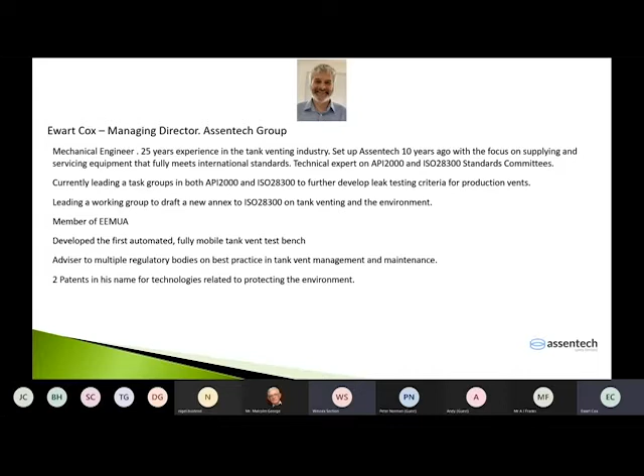Before I go into the presentation, we've been looking very closely at how we measure and control flow through the test benches. Where I'm going in this presentation only comes into the technical detail about a third of the way in. Because I've been developing this myself with a couple of colleagues, sometimes you feel you're too close to it and can go into a lot of technical detail without putting everything into context.

So I've done a few slides on just why we think that leak testing on breather valves is important.

David Attenborough has said in his recent book that we are the first generation to truly understand the impact we've had on the environment, and the last to be able to do something about it. I'm definitely dedicating my career, or what's left of it now, to ensuring we do what we can to produce technologies that can reduce emissions.

Probably quite relative to my career - I'm 56 now - given 1 hour to save the world, Einstein would spend 55 minutes defining the problem and 5 minutes fixing it, and that feels a little bit like where I am right now.

I've spent a lot of my career trying to work out how to make the most of breather vent function, and now we've got the solution. We're out there trying to get these into the mainstream and get people using them.

Mark Carney - interesting guy. We all know him as the ex-governor of the Bank of England, but he's now UN envoy for climate action, particularly with an interest in finance. He says a lot here, and this presentation is available to anybody that wants it at the end of this talk.

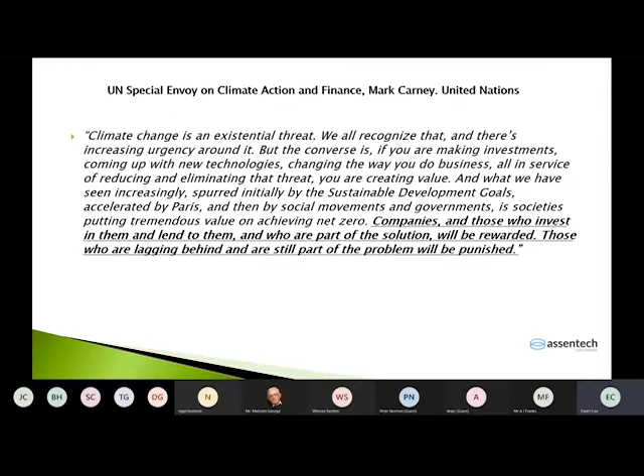Without going into the full details, at the end he says the companies who invest in reducing emissions to the atmosphere and improving our condition currently will be part of an overall solution and will be rewarded. Those who are lagging behind will be seen as part of the problem and will be punished. So it's an interesting aspect that we've all got a role to play in reducing emissions to the environment, and I am very much an environmentalist from that point of view.

Principal aims for reaching net zero: we're talking about emissions from tank breather valves, and there are a lot of tanks based around this country, and a lot of them contain volatile organic compounds. So there's a big part to play with the tank storage industry in terms of reducing emissions.

Reaching net zero, in accordance with the Paris Agreement, COP21, was not to exceed a global warming target of 1.5 degrees C over pre-industrial levels. The initiatives are now in the mainstream. The whole industry has completely changed in the last 18 months to 2 years, and it's now part of the daily dialogue about how we can reduce emissions.

I've been working on this test bench for 7 years, but now timing seems to be quite good for what we're doing. Adaptation - everybody is now looking actively to reduce their carbon footprint. Offsetting is a big part of that, and I genuinely don't fully understand what offsetting means, apart from some of the big operators now planting forests in South America and things. But offsetting has a part to play in the whole way that we reduce emissions to the atmosphere.

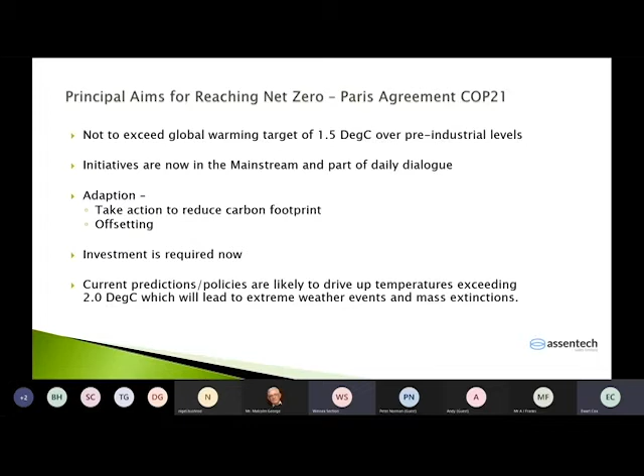Investment is required now, and we've invested a lot of time into developing technologies to reduce emissions, and we want to see those rolled out. Current predictions and policies are likely to drive up temperatures exceeding 2 degrees, which will lead to extreme weather events and mass extinction. So, not wanting to sound extreme, this is quite important that we do something about it, and we've all got a little role to play.

So from an ESG investment perspective, many of you may have heard of this, it's environmental, social and governance advice. PwC are just about to start a recruitment drive for 100,000 new heads. Ernst & Young, KPMG, Deloitte are all doing the same. So all the big blue chip companies are now having to report and declare their carbon footprint and a number of metrics, all agreed by the Intergovernmental Panel on Climate Change, the IPCC. We've all heard about the IPCC on the news.

So this is what the majors are saying. Everybody is on the route to net zero. So it's time. Our mission is to help investors improve profitability and safety by detecting and reducing fugitive emissions that can harm people, wildlife and the environment. We want to work together with our customers to get them on the road to net zero in our particular niche of industry. We're very focused on a small niche of the industry, but we think it's an important one.

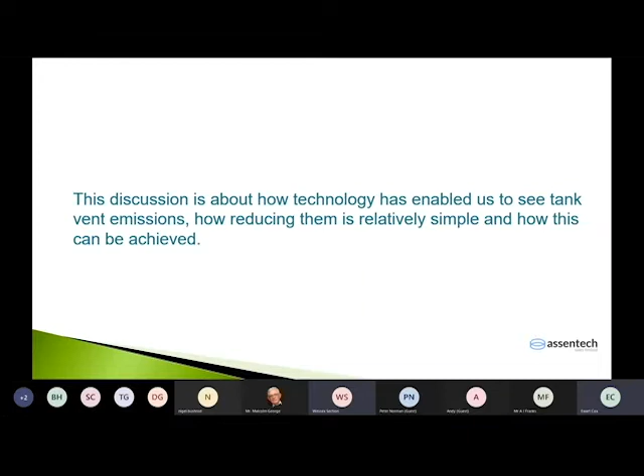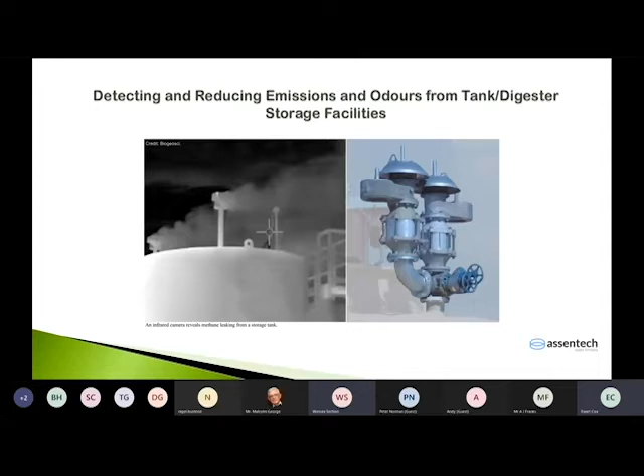So this discussion is about how technology has enabled us to see tank vent emissions and how reducing them is relatively simple and how this can be achieved. This is just a cover sheet really for the start of the presentation. The next part is really a breakdown of the areas where we can help reduce emissions.

So optical gas imaging - there are two camera technologies available. One camera is a long wave uncooled camera, which is generally used in the biogas industry, for looking at, it picks up methane. And the video that follows in a moment will show you methane emissions. There's a shortwave cooled camera that can be used to detect a wider range of volatile organic compounds. I should say the uncooled camera is also used for detecting SF6, sulfur hexafluoride, which is used on power transformers, that sort of thing.

So the third item there is the quantitative tablet. Some of the regulators are now seeking to act on measurement of emissions from tank storage or any sort of facility where there are leaks, and this quantitative tablet is now being used for enforcement. It's quite an interesting piece of equipment.

So how are we doing? How are we helping the industry improve? We're offering technical advice and support. I've got 25 years plus experience in the industry, and every day I learn something new, and every day I share a lot of my experience with customers. So we want to share our knowledge and help customers use venting accurately and get the most out of them.

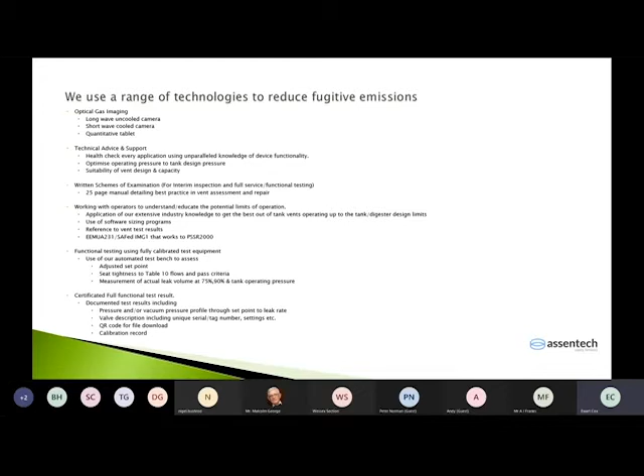Okay, so here's a short video.

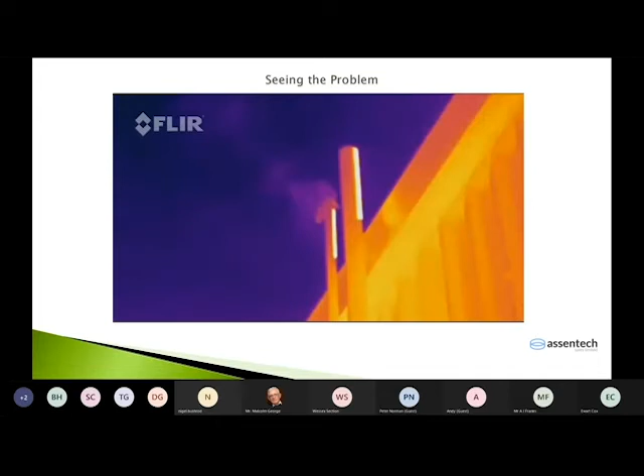Thermography is a very interesting science, and we've been working with FLIR cameras now for a couple of years, and we find the technology absolutely fascinating.

To give you a feeling for the process pressures we're working with, an average storage tank has an operating pressure of about 20 millibars. That's not enough to fully inflate a party balloon, but it will lift a 25-meter tank off its base, creating a 10-ton lifting force. So the pressures are tiny, but the forces are huge.

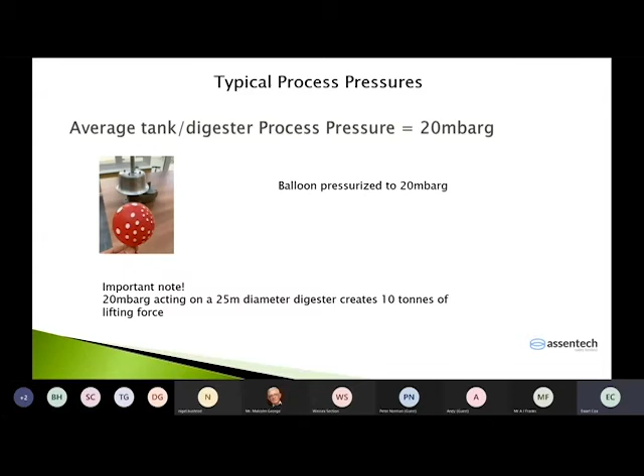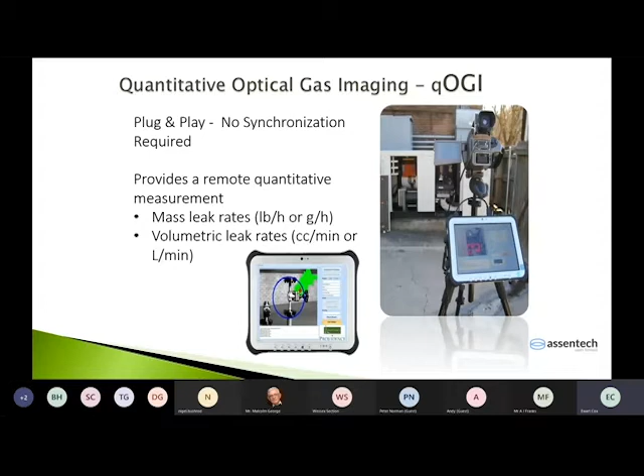This is quantitative optical gas imaging. It's a tablet that fixes to the camera, and in this photograph it's a shortwave, cooled camera. If you put in the basic details of the VOC, it will calculate the actual volumetric flow. Very interesting technology.

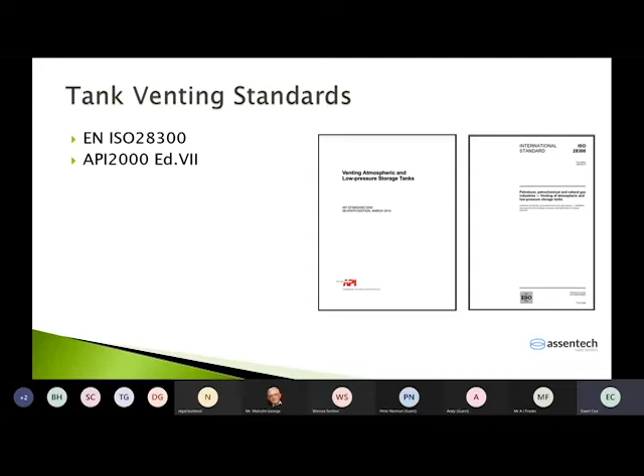The tank venting standards we work to include ISO 28300, launched in 2008, which is currently being reviewed for revision, and I'm on the committee for that. API 2000 is currently in edition 7, started back in 1968, and edition 8 is coming up shortly. I'm also on that committee. So, a brief history of leak testing.

Even though it's not in common dialogue, leak testing was first listed back in 1966 in an API bulletin, and it has continued to evolve, now forming part of the current core standards for tank breather vents.

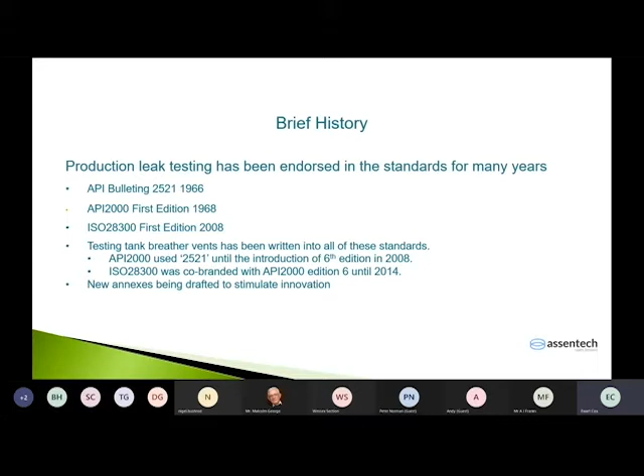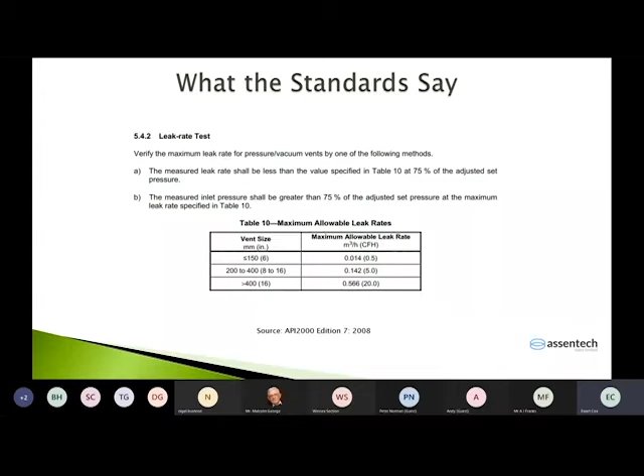These standards define the allowable leak rates from a storage tank based on size. Up to 6 inches, you're allowed 0.5 cubic feet per hour. 8 to 16 inches is 5 cubic feet per hour, and 16 inches or larger is 20 cubic feet per hour. To put it in context, 0.5 cubic feet per hour is about the size of a large shoebox - that's the amount of air allowed to escape past the valve on a test bench during the test in order to pass the criteria. So it's quite a tight test.

Some worrying facts - this gives you an idea of what we've learned in the last 25 years operating in this industry. Of the 20 manufacturers we regularly come across, only 2 undertake production test, leak and calibration testing of new valves prior to dispatch to the industry, for standards on both pressure and vacuum. So only 2 companies do the tests properly, exactly to the standards, on both the pressure and vacuum sides.

We don't think it's safe practice, because there's no guarantee the valve has been assembled correctly. Unless you do a test at the factory before the valve is dispatched, you don't know it's been assembled correctly. You put it on a tank that costs over £1 million to replace, and you could pull the tank in because somebody's put the pressure pallet on the vacuum port and vice versa. And they will fit - believe me, they do fit. Usually they've got the same seat ring diameter, so it's only the height of the stem and maybe the weight that would tell the difference.

Because you're not going to get any documentation, you won't have any way to conform to ISO 14001. One of the easiest wins for ISO 14001 continual improvement is to produce leak test certificates for the valves.

Critical asset documentation, service trails. Breather vents are often classified as critical assets under COMAH, and you can produce a very easy trail of review and functional testing if you have leak test certificates, but you can't if you don't. There's no declaration of leak tests on a valve that's not been tested, so you can't use it as part of your DSEAR review either.

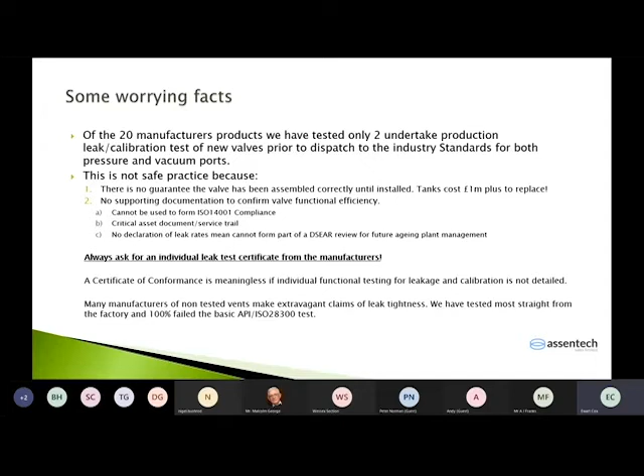And many of the manufacturers of the non-tested valves make extravagant claims on leak tightness, and we've tested most straight from the factory, and all of them failed even the most basic leak test. So there's a lot of smoke and mirrors in the industry.

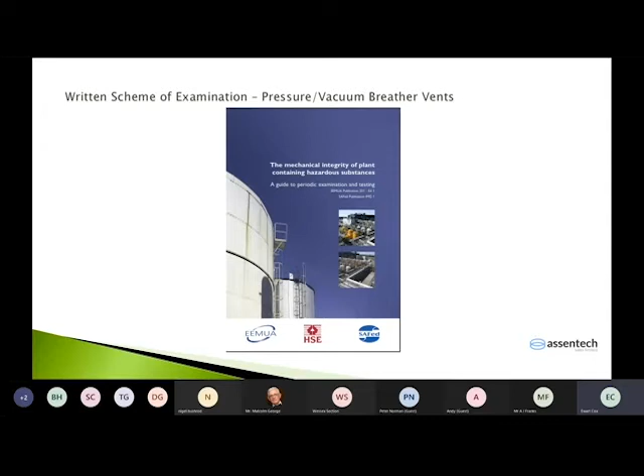So functional testing, this is the bit where I get excited, is that we've developed these devices to measure the functional performance of breather valves. As you'll see, the valve has to be removed from the tank. So this isn't something that you would normally do on a tank every year, unless you had a severe acid or some kind of process where you do need to strip down every year.

Typically, a valve would need a full functional test every 3 years. So we can do 2-inch to 30-inch valves, weight loaded, spring loaded, pilot operated, and we can also test blanket gas regulators. The funny looking dartboard on the right side is for side mounted valves.

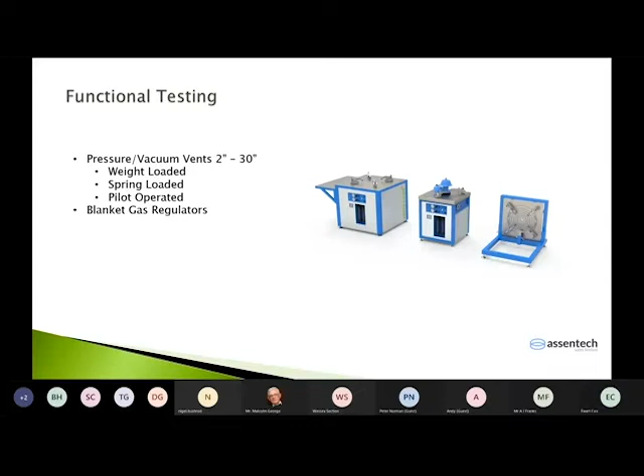It goes in conjunction with one of the little mobile units or the large static, right down to basic forms. The breather valve - I apologise for my rubbish graphics here - but yeah, essentially all the test bench is, you have a pressurized air supply into the valve with a mass flow controller and a pressure sensor.

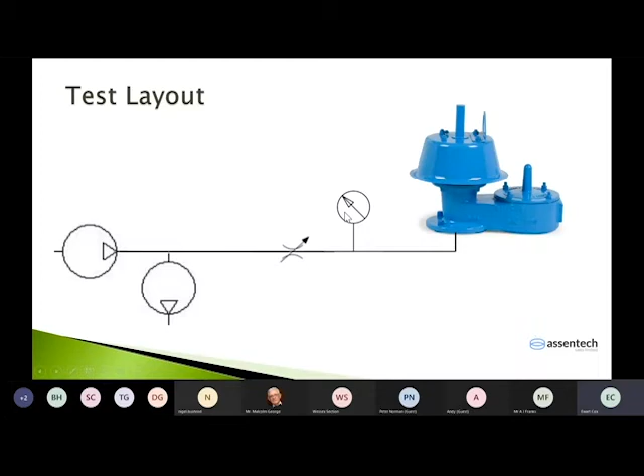So what you record on the laptop that's connected with the test bench is the retained pressure under the valve under certain flow conditions. And the vacuum test is, again, you just pump air out of the test bench and it gets drawn in through the vacuum pallet. You measure the pressure and you control the flow. Very, very simple.

So we cover two elements of the valve function. You've got set point testing, so we fix the flow and you will get a variable pressure. What we're looking for is the standards say that as you increase the flow, you should see a corresponding increase in retained pressure. The point where you increase the flow and you don't see an increase in retained pressure is what is defined as the set point.

It's not like a safety relief valve where they pop open. The set point can be measured by weighing the pallet on calibrated scales, so it's basic physics, force equals pressure times area, but the actual functional test must be done using air. Standards say that the set point should be checked using airflow.

Why should you do that? As I've already mentioned, you've got to first check to ensure the valve was correctly set up. The second point is efficiency, because the valve is a modulating valve, the set point and the leak tightness are very closely linked. On a breather valve, you can create whatever set point you want - it's just a matter of how much air you're putting through it. So knowing the airflow is absolutely critical.

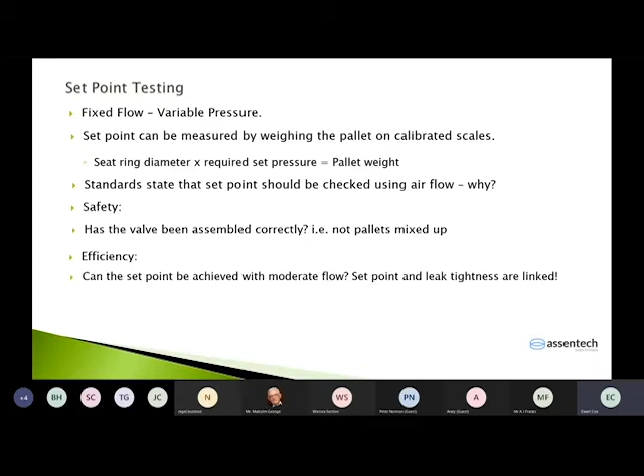So leak testing - this is the big part of the technology we've developed within the test bench. The pass criteria is that you fix the flow. For example, if the valve is less than 6 inches, you fix the flow at 0.5 cubic feet per hour, and you measure the retained pressure, and it has to exceed 75% of the set point. The flow control must be accurate to 0.5 to 20 standard cubic feet per hour to replicate the requirements on table 10 of the standards.

So we use multiple flow controllers, mass flow controllers that control the flow. In the test bench, we use 2 mass flow controllers, and for high accurate leak testing, getting down to bubble testing level, we have a 3rd unit that we put in there. Many customers are now looking for the leak rate at 90%, not 75%.

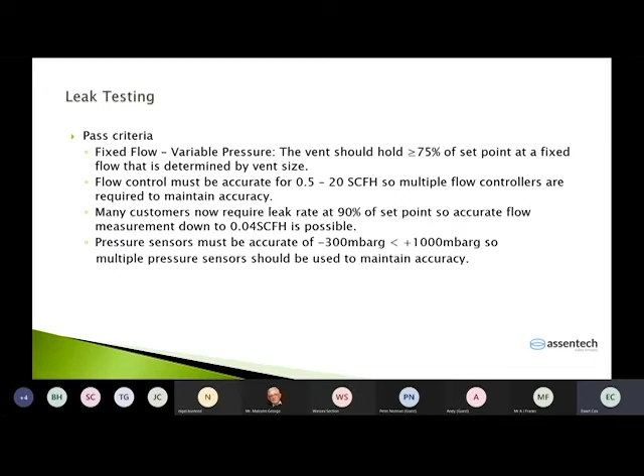We have recently revised our mass flow controllers and pressure measurement so that we can go down to 0.04 standard cubic feet per hour. The pressure sensors must be accurate for minus 300 millibars up to plus 1000 millibars gauge. So we use multiple pressure sensors, and the test bench automatically picks which pressure sensor it's going to use based on the criteria that you set in the valve, in the test bench.

So why is leak testing important? Profitability. The area where most operators are concerned is to ensure they run their tank farms as efficiently as possible. This is all about sustainability, so accuracy of valve function is quite important.

From a quality point of view, volatile organic compounds have light ends which evaporate first, so you can get batches rejected if it's off spec. So keeping those light ends in the tank is important.

Water can be drawn into a tank when it cools down at night. If the valve leak tightness is good, the valve will sit at slight positive pressures during the day. When it cools down, it won't draw in wet condensate, and then you don't get the problems with oxidization, which leads on to the second one. Oxidization of both the liquid in the tank and also the inside of the tank, causing rust particles and contamination that way. And you've got a documented asset management system.

So quality is documentation, so you can keep a tight record on what the function of your valves is. So sustainability in the environment, ISO 14001 is important. Corporate governance, we'll talk about the ESG requirement shortly. Road to net zero, reducing odours, reducing the risk of

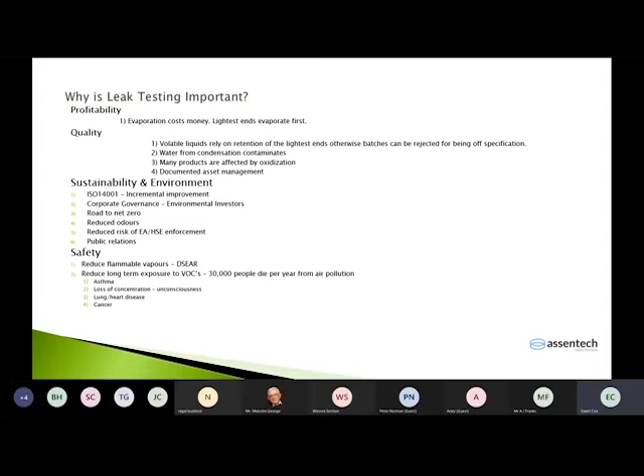In fact, I think it's higher than that, but the vast majority of those are from road transport, but a lot have connections with volatile organic compounds. And that could lead to asthma, loss of concentration and consciousness, lung and heart disease and cancer. So yeah, volatile organic compounds are not good products to be breathing in on a regular basis.

So testing. Efficient testing for set point and leak rate requires the pressure sensors within accurate range with minimal deviations. That's something we build in, and the test bench automatically chooses the right pressure sensor for the range that you're seeking. And flow control is we're now working on a flow rate from 0.04 cubic feet per hour to up to 100 cubic feet per hour.

The procedures - we don't recommend that you test pressure vacuum relief valves on safety relief valve test benches, because they're not calibrated for the very low flows or flow control as a normal breather valve would require.

The additional information that operators are now looking for is not only do they want to know whether it passes, but they're actually asking us what the actual leak rate is at the 75 or 90% of the set pressure, and or the operational pressure. So we can now measure that using mass flow sensors that are built within the test bench.

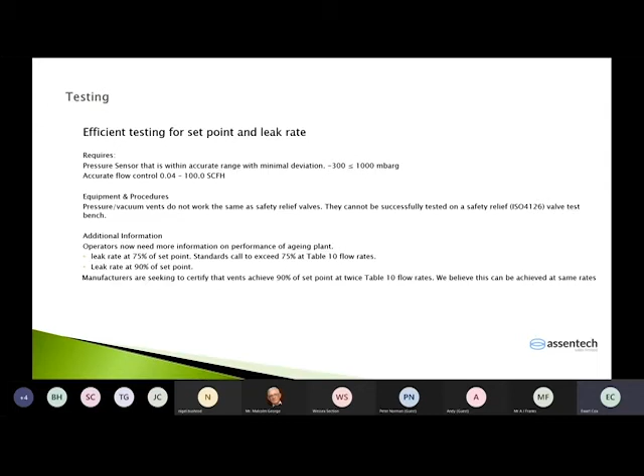So independence of results. We built our first mobile test bench about 7 or 8 years ago. We'd had a fixed test bench for many years, but we then developed this to a mobile test bench, and we had a manual version for many years. When we started investigating the possibility of building our own test bench to apply to the market, we decided to go down the automated route. And the reasons for that are here.

So we wanted to be able to produce fully independent test results. We want to avoid any confusion on site, so avoid the human error or integrity issues. When you produce a set of results, it could be if a valve fails that the operator may need to consider replacing that valve. So we want to make sure that the results that we produce are top integrity and they're fully reliable.

Repeatable tests: we found that using rotameters, two service engineers can produce completely different leak rate results. Because the test bench we've developed has artificial intelligence built in and works on fixed algorithms, it will produce exact identical results every time it tests. So it's fully repeatable.

We can remotely control it because it's cloud-based. You can operate it remotely if you choose to. It's not an obligation by the operator, because some sites we work with do not allow any computers to be connected to the internet.

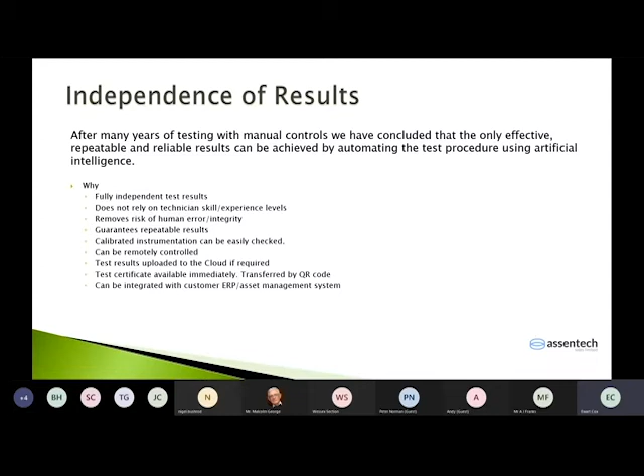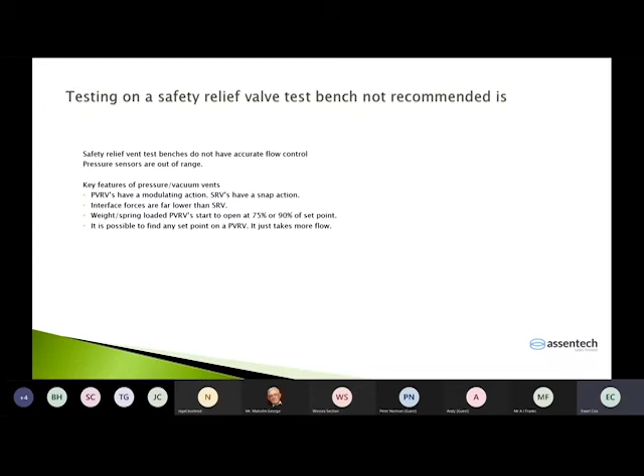Testing on a safety relief valve bench is not recommended. This is typically something which could go up to 100 bar test pressure. We just don't feel they're the right type of equipment to accurately measure leak rates on a pressure vacuum relief valve working at 20 or 5 millibars.

Here's an example of a test, I'll just quickly run this. So just to give you an idea of what we're looking at here: the black line is the valve set point, the blue margin is the allowable tolerance, plus or minus, in this case about 5%, and the green portion is the allowable pass rate.

You'll see down here is 0, and just here you see that the pressure is starting to increase, and the line will go up past the green and into the blue, and it should hit the black and then level off when it hits a set point. You'll then see a drop off of pressure as the test bench goes from set point test to a leak test.

And then the pressure will increase very slightly over a few seconds to indicate what the reliable leak rate is. So you can see the pressure increasing, and this is what you'll get on the readout on the laptop that's connected to the test bench.

So the valve was burped, and it now switches over automatically to the leak rate. In this particular case, the valve's current flow is 0.5 cubic feet per hour, and the flow and retained pressure increase very steadily now.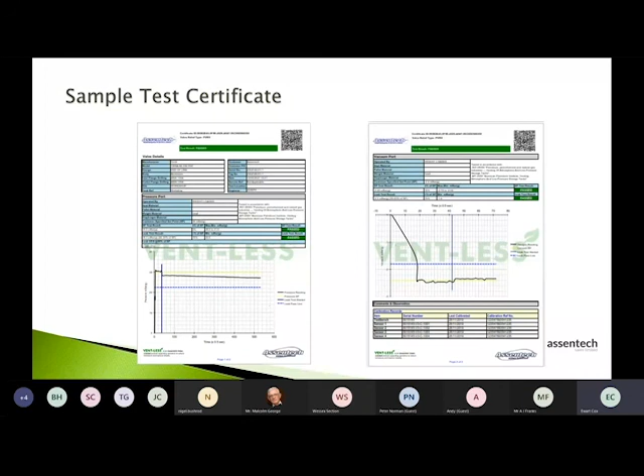We have some customers that won't allow us to put the valves back on the tank until they see the test result, so this is available instantly at the end of the valve test. It requires no input from the technician to fill out any forms - it's all there pre-filled in.

So from a calibration point of view, what we've done is developed this calibration module that clamps onto the top of the test bench, connects with an RS232 plug to the test bench, and follows the pressure. When you connect it up, the test bench recognizes the calibration unit's been connected, and it will automatically run through a test cycle.

You get a blue line and a red line - the blue line being the test bench, red line being the calibration unit - and they've got to track each other. The test bench is designed to allow the tolerance to ensure all the sensors on the test bench are matching those on the calibration unit.

For overseas operators, they could periodically send the calibration unit back to us for checking, but that means they don't need to send the actual base unit back to us at all until, or if, there ever becomes a problem with reading the results.

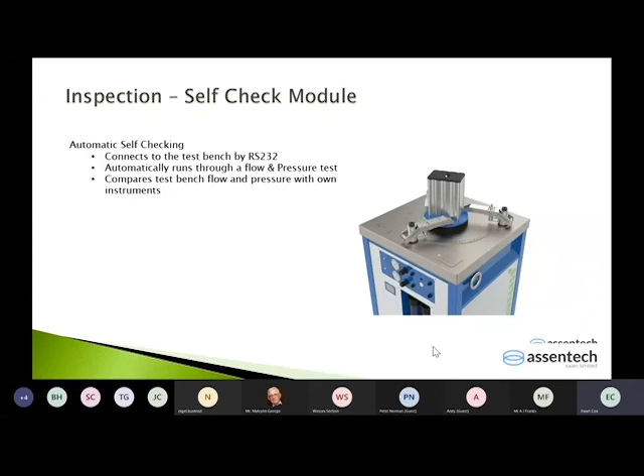So here's a case study at the end of the presentation. This was on an anaerobic digester facility, and we were contacted by the Environment Agency and the operator at the same time to help resolve a problem. They had some low-cost devices on site, and the emissions, the odours from that site were immense. The health and safety executive was considering closing the site until they got a resolution, but we helped them solve their problem.

Essentially, the benefit of the test bench was that they gave us the old valves to test. We also tested the new valves that went onto the tank to resolve the problem. The old valves were low-cost and relatively low technology, so they had high leak rates.

The cost to run those valves over 3 years - even though the valve was £2,950 at the beginning - the cost over 3 years to run that biogas, with methane losses calculated with the cost and servicing, was £20,824. The global warming potential produced was 545 tonnes of greenhouse gas.

So GWP is global warming potential, which is a calculation we have established using standard calculation methods, and that is the equivalent of 108 double-decker buses.

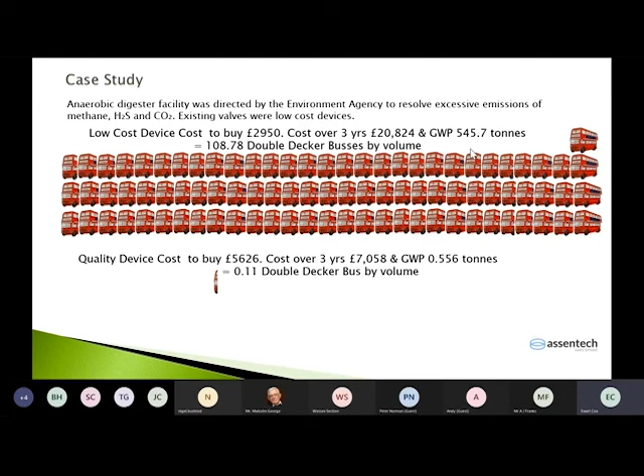So this gives you a nice warm feeling when you see what can be achieved just using standard technology.

The cheap valve lost so much methane, and this was a biogas, anaerobic digester site, so they sell their gas. This was straight off of their bottom line.

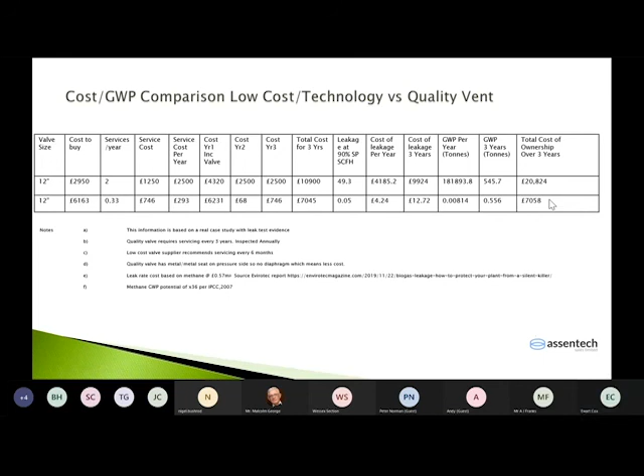So the EA then came back to us and said our work will stop thousands of tonnes of damaging greenhouse gases entering the atmosphere, and they were very pleased with the work that we did.